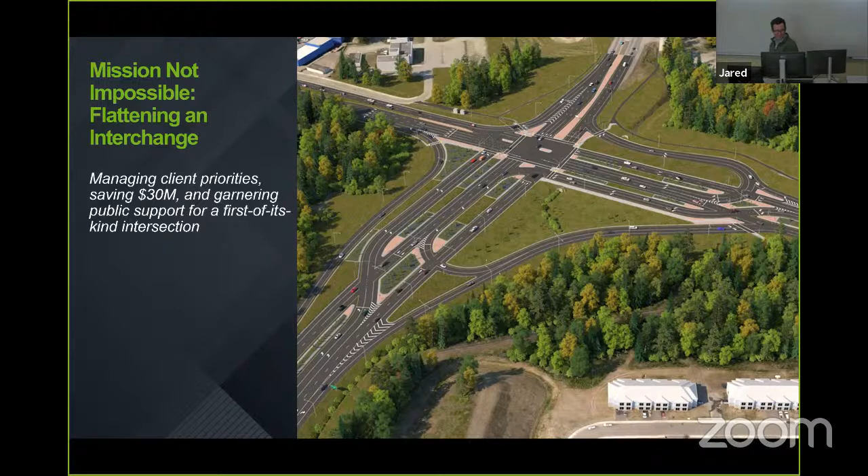If I want to refer to my notes and such, should I situate myself right here? Yep, and we should be going live now. Okay. Oh, you don't need to. Okay, you got the lights on you.

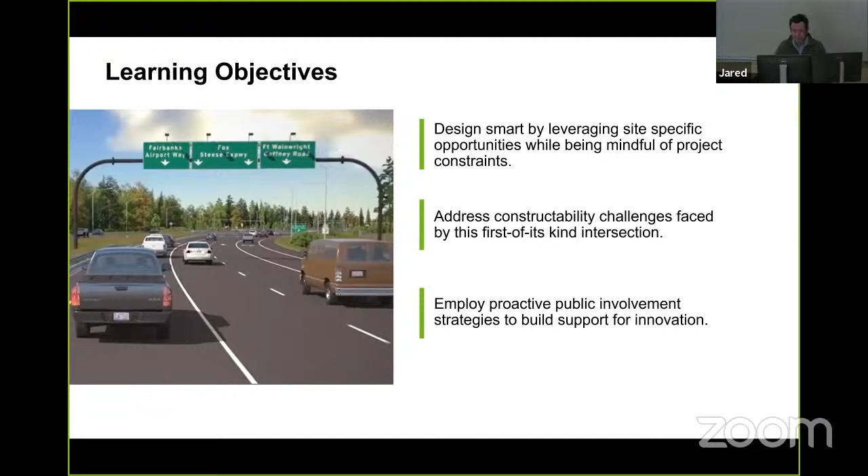The mission. Chapter 1. So here's the intersection of our focus today. This is in Fairbanks, Alaska. This is the nexus of Airport Way, Gaffney Road, Richardson Highway, and Steese Expressway. Some of you may be familiar with this intersection. But there's a lot going on at this intersection. It's a priority 1 intersection. That's engineering and transport lingo for it's really important and heavily used.

We have the Richardson Highway progressing from the south. Boy, I'm not sure why it slips backwards. Oh, this is you, Will. Here I am touching buttons and I should be cueing you. Next slide.

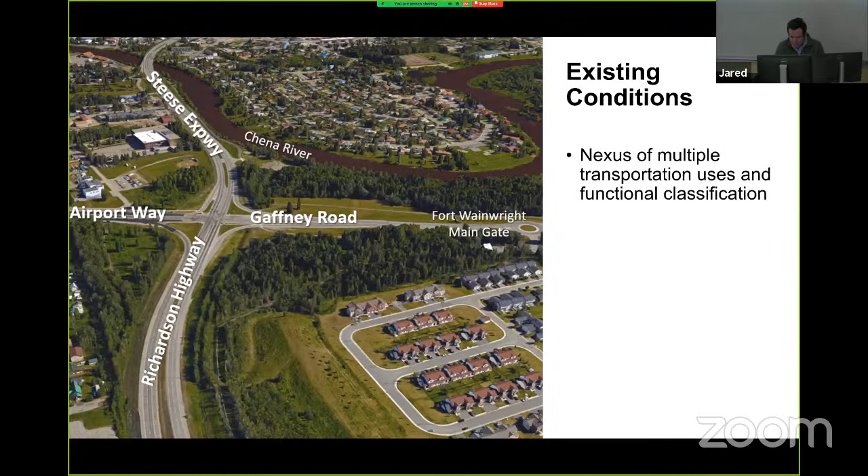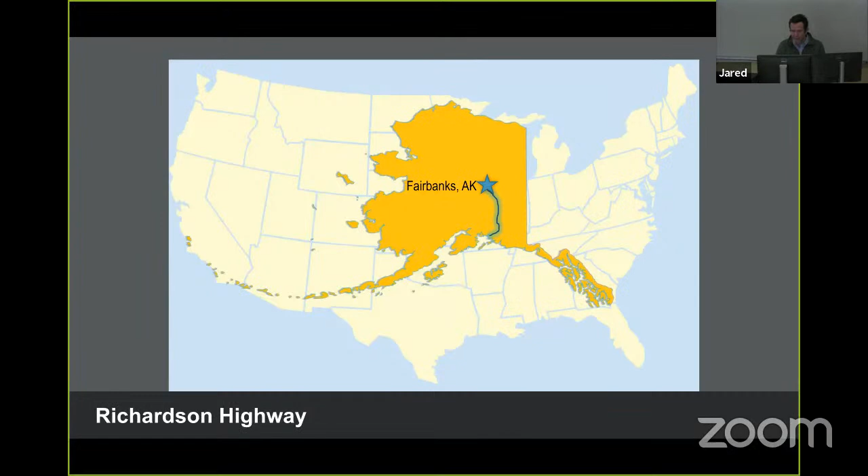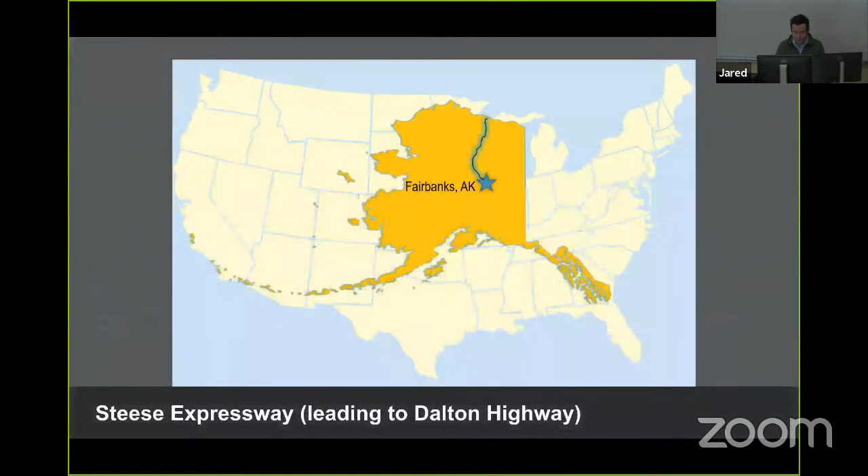Unfortunately, I can't see my notes, but we've got some 500 miles of Richardson Highway coming up from the south, and another 400 on the next slide. You'll see the Dalton Highway, which extends to the north. What does that mean for this project? It means a couple of different things. It sees a lot of traffic and it sees a lot of very, very heavy vehicles. This is something you need to consider in your engineering plan. The roadway structure needs to support not only a lot, but some very significant vehicles and their turning radiuses. Next slide, please.

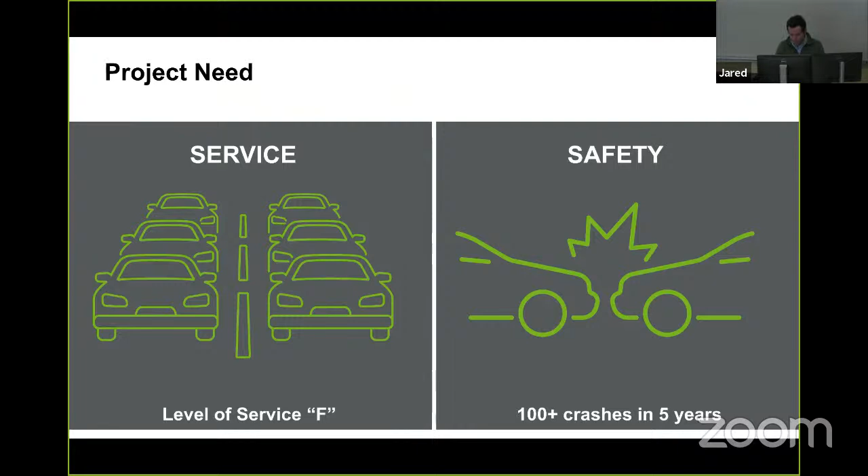Level of service, this is again some engineering and transport lingo for how well is this intersection performing today. Some of you may be more familiar with what an F means than others, but it's not good. It's also a very dangerous intersection, and this project is funded by HSIP funding. That means it's paid for by government dollars. Their focus is on safety of the community. So safety, as always, but particularly with an HSIP funded project, is of the utmost priority. Next slide, please.

So HDR was handed a preferred interchange concept. The way a project works is a lot of months and years go into a design before you really start getting down to the nitty gritty. It's kind of a conceptual feasibility phase of the project. And this is the design that was brought to our table. And it's not the design we ended up implementing. There are pros and cons to this diverging diamond design. You may have seen diverging diamonds in Anchorage. But there's pros and cons to this design.

The pros are typical to DDIs. It could handle the capacity, that's how much traffic we can move through the intersection. It can handle some of the heavy vehicle traffic, not only for vehicles heading north to the North Slope, but also from Fort Wainwright to the east of the intersection, and it handled capacity.

But it did close 10th Avenue north of this image. 10th Avenue is a left turn northbound, which handles an awful lot of traffic. And the reason it closed is because those ramps in the northeast and northwest quadrants extend quite a bit north. So that was a bummer that we weren't ready to palate.

And then it also involved right-of-way acquisition. In general, or always, that's something we try to avoid in construction and transportation projects. You don't want to take people's private property. Next slide, please.

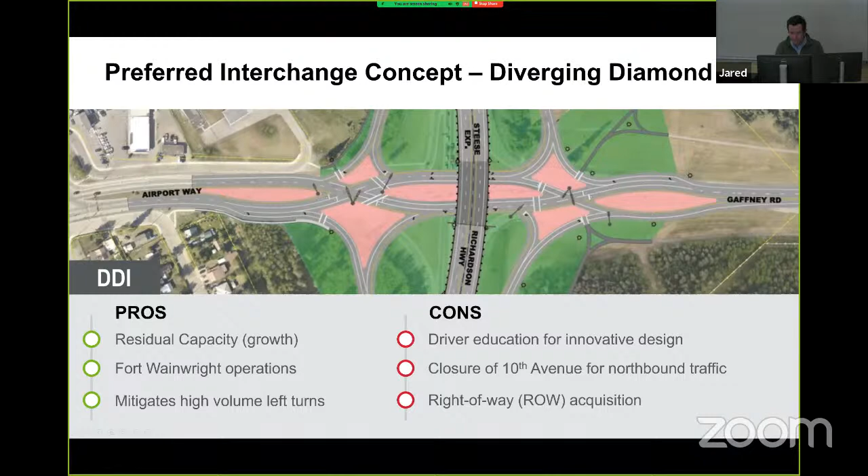So the question arises, is this mission impossible? And what tools do we have in our toolbox that we could implement to solve some of these issues? I'll hand it over to Will.

So at the moment, the current plan was to build a grade separation, full interchange at Gaffney, a DDI that's going to improve safety by removing conflicts and improve congestion by adding capacity via the free flow movements and the grade separation. However, once we started designing that, we got to an engineer's estimate that was close to $47 million.

The client, the DOT, Department of Transportation, said, hold on, are we sure this is the right solution for this intersection? And essentially what was a catalyst for us to take a step back and reevaluate the entire solution was the fact that Jared mentioned HSIP funding. That is a program for the state of Alaska where they have $50 million annually to spend towards transportation improvements that are going to have a significant reduction in crashes.

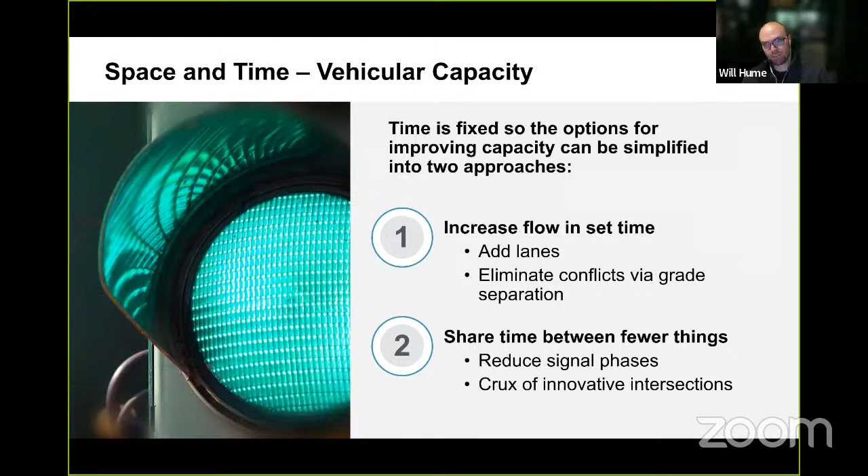But it's not just about capacity when you think about innovative intersections. It's also a way to improve safety for the vulnerable users, like pedestrians or those on bicycles, as well as improving safety for vehicles by removing conflicts within the intersection itself.

Ways that innovative intersections at times improve the intersection for pedestrians is they typically have shorter crossings, or they're crossing multiple road beds individually, and it reduces the number of conflict points, potential directions that can be involved in a crash. Other ways is it simplifies pedestrian decision making, and other treatments.

Since we have more green time available for the larger movements, we can do some other treatments with our signals that are proven to benefit pedestrian safety. One is where you give them a green light and let them start crossing the intersection before you release the vehicles from their stop bar, essentially protecting them, making them more visible within the roadway, and reducing the potential for turning vehicles to strike a pedestrian.

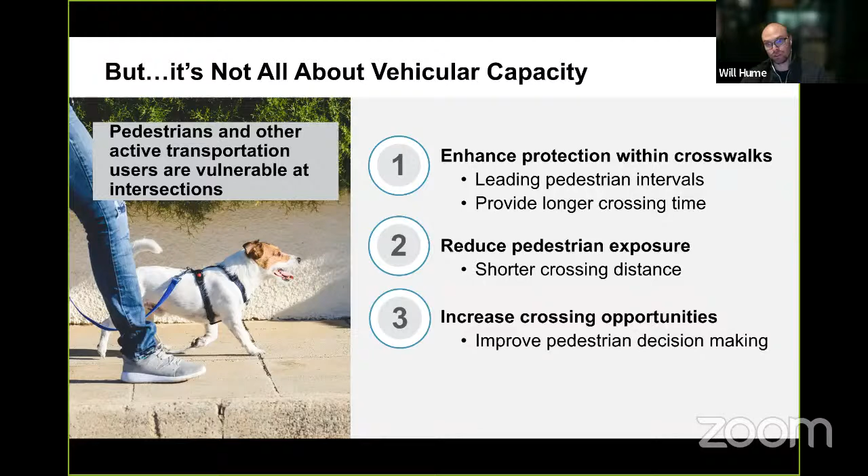So I'm going to talk a little bit about what an innovative intersection is. Really, the basic building block of an innovative intersection is a hyper focus on the left turns. And it's not left turns at the intersection, it's how can we remove the left turns and give them back to the traveling public in a different manner. And so these left turn treatments that we look at are displacement, diversion, or removal of the left turn altogether. And I'll walk through what each one of those are.

For displacement, the different types of intersection treatments that fall under the displacement category: one is your continuous flow intersection, or CFI. The other is for an interchange. A diverging diamond interchange is a form of a displacement. The second version or category for left turns is diversion. This would include your median U-turns and your restricted crossing U-turn type intersections.

And then the third option is you remove it altogether. You can prohibit left turns and throw up a sign and say left turns go somewhere else. You can utilize jug handles, or you can utilize quadrant roads. And I'll walk through each one of these, so you're aware of what each one of these look like and how they function. So I'll start with a CFI, or a continuous flow intersection.

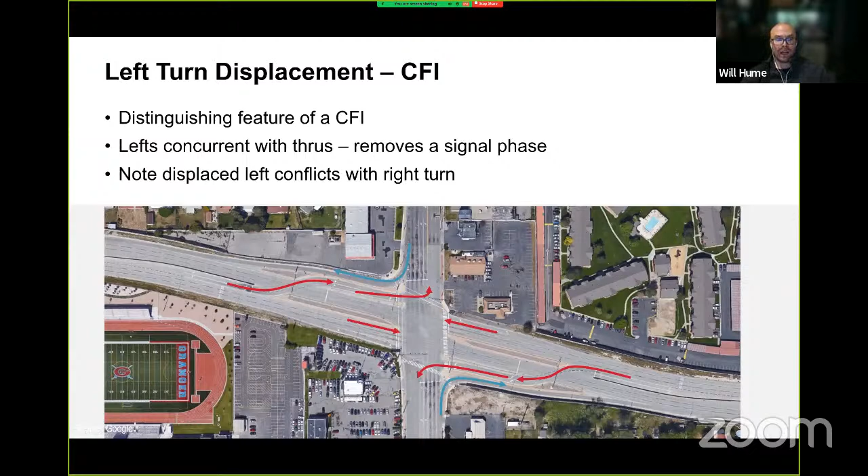The type of diversion type intersections, I mentioned a restricted crossing U-turn or an R-cut. And I also mentioned a median U-turn. These are also referred to as Michigan lefts, as there's quite a few of them in the ground in Michigan itself. And the whole purpose of these is to essentially send the left turns through the intersection and have them U-turn downstream at adjacent intersection.

A restricted crossing U-turn, however, doesn't just handle the left turns by diverting the left turns. It actually diverts all of the minor approach movement and forces them to turn right. Once those movements turn right, what would have been the through movement and the left turn movement, they are then U-turned at a signalized intersection downstream of the main intersection, at which point they travel back through the intersection and complete the intended movement.

The difference between an R-cut and a median U-turn is that the median U-turn still allows the minor approach through movement to occur at the main intersection, and it is only diverting left turns. And for this instance, the left turns would then, similar to the R-cut, turn right, they would then U-turn downstream at a signalized intersection, and then head through to complete their intended movement.

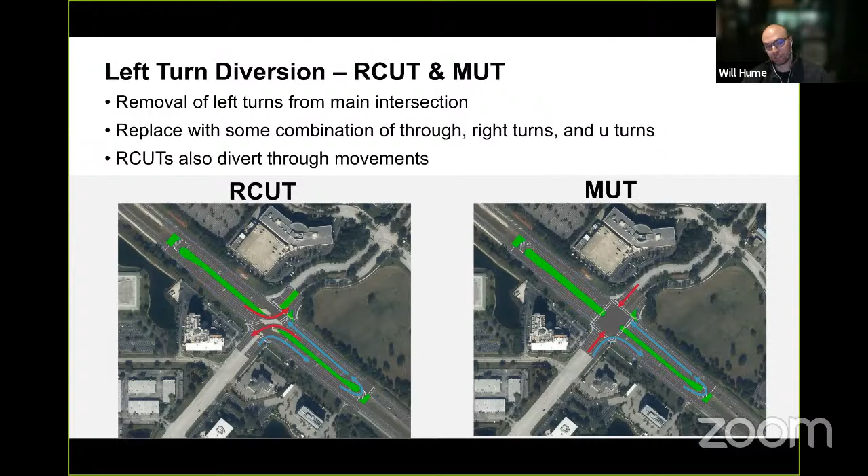The other type of innovative intersection is the quadrant road, and essentially that takes all the left turns out of the main intersection and looks to provide them utilizing one or more of the quadrants around the main intersection. And so for this particular example, all the left turns would utilize this quadrant road. It would add a signal adjacent to the main intersection to handle that increased movement through there.

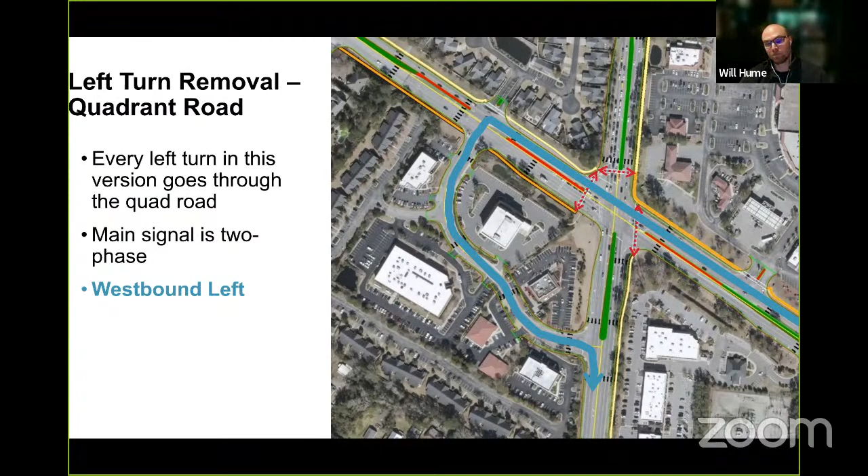And this allows for increased capacity as well as longer green times for the main through movements at the main intersection. And those are where your pedestrians are running with the through traffic. And so at times in areas where you implement a quadrant road, you end up providing more walk time for pedestrians, calming their walk across the intersection and improving for that.

So we took those tools and said, all right, everything is in play for our improvement at GARS. What can we do at grade to significantly reduce the cost and improve capacity? And so we applied some symmetrical treatments, meaning if we did one thing on one leg of the intersection, the mirrored opposite leg, we were going to do the same thing.

So the CFI, we did recognize some of the detriments. It only was diverting two of the left turns out of the main intersection, and so it wasn't addressing all left turns. There were still right-of-way impacts for the southbound bypass right turn and the displaced eastbound left turn. And the location of this eastbound left turn, you can notice this Noble Street here. This is also a signalized intersection, and so it was very, very confined between two signals.

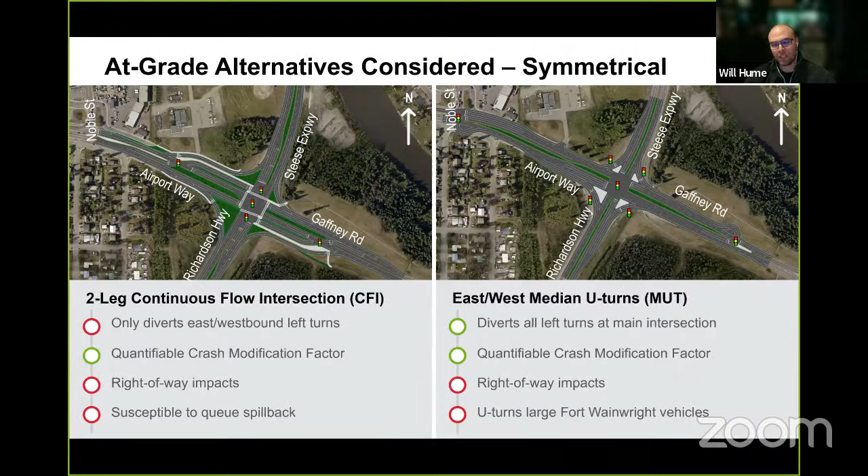When we developed the microsimulation model of this, it worked extremely well. It worked at the same level that a full-blown interchange or the DDI was functioning at. And so we thought we had a winner with this one. Although the footprint is quite large, it stayed within all existing DOT right-of-way, and it wasn't going to require any right-of-way.

Some of the reasons why this wasn't determined to be the preferred alternative was the fact that we are combining these elements in a way that we didn't feel we would actually be able to quantify a crash modification factor for it. And without that, we would potentially be losing our federal funding. Some of the other detriments, although we're utilizing DOT right-of-way, we're impacting a lot of the existing trees. Those trees don't just improve the aesthetics of the intersection, they also act as a buffer for sound to the adjacent homes. And so we did recognize that as an impact.

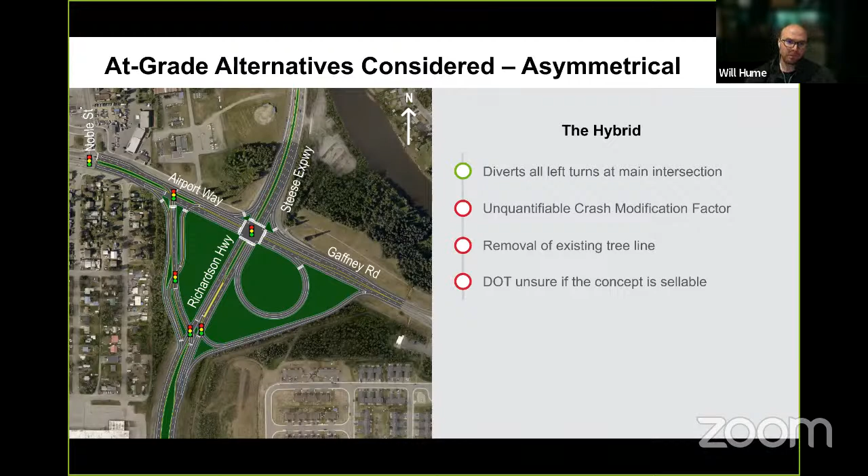Ultimately, the DOT said, I don't think we could take that to the public and sell it as the solution. And so they said, what else do you have? And we said, all right, give us one more chance, and I think we can come up with something. And that's where we developed the CFI MUT hybrid. This innovative intersection, although it looks like a bowl of spaghetti from a bird's eye view, essentially is a CFI MUT combined for two of the legs.

The eastbound left, as you see highlighted on my screen, would go through the main intersection downstream to a signalized dual left turn. This signal is highly coordinated, and so vehicles would not be stopping more than once. And they would complete that U-turn and then make a right turn back at Steese to complete their movement. That eastbound left is paired with a displaced westbound left or CFI treatment, at which point they would be located to the outside of the opposing through movement and running on the same phase as that through movement at the main intersection. Similarly, the northbound is a CFI treatment, displacing them to the outside of the southbound through movement, and that is also paired with an MUT movement for the southbound.

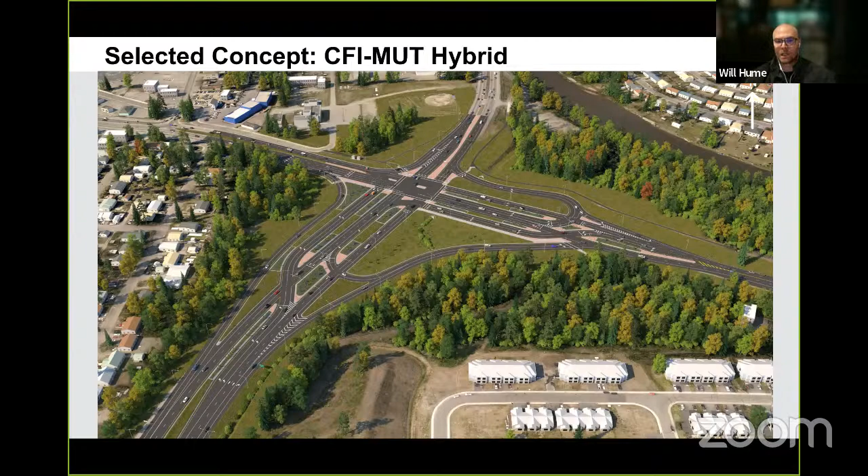Like I said, this from a bird's eye view does look quite complicated, and although we're taking one signal and breaking it into three, through really good signal coordination and spacing of the signals, we're able to provide some really good operations for this, as well as recognize the safety benefits of those CFI MUT treatments. And so this one really did check all the boxes. It diverts all the left turns out of the main intersection. We were able to develop a quantifiable crash modification factor, just normalizing the CFI and the MUT treatments. There's no right-of-way impacts, and Fort Wainwright was quite pleased to see that really their movement is prioritized and they're not increasing the vehicle miles traveled.

When it came to checking the client's goals of reducing the total cost of construction, the capital cost was estimated to reduce from $30 million. And so we were able to get it down between 15 and, when all said and done, around $17 million. Comparing annual maintenance costs, it was also less than if a full-blown interchange is going to be constructed, although the no build from a maintenance standpoint was going to pencil out the cheapest until it reaches a breaking point. And so overall, beneficial cost savings.

The question is, how happy do you think the general public was to see such a unique and innovative alternative concept for the GARS intersection? You can go to menti.com. I don't believe that link is live. But you can think about it.

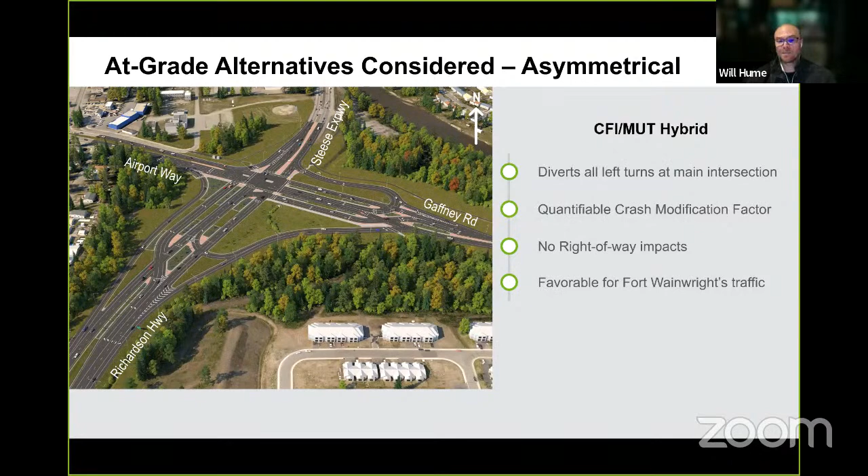You as a public, you're traveling through this intersection every single day, a typical T intersection, and one day DOT and some engineers say, hey, I got an idea. We're going to do this. And this is what we showed them. And ultimately, let's just say the answer is C. The public were not on board entirely from the get-go. They were angry. They let their opinion be heard.

And most of them wanted just to go ahead with the DDI, spend the money, even though that would essentially remove funding for hundreds of other safety projects across the state. And that's where the mission gets even more complicated. I'll turn it back over to Jared.

So we're getting into the part of the presentation where we just wanted to touch on some aspects of the profession of transportation engineering that's, I'm not going to say unique, but I'll say it's special to our discipline. Transportation engineering really touches on so many things. It very much touches on water resources and management of water. Where's the water going to go through our projects? It very much touches on geotechnical engineering and structures and transportation and civil and construction management.

Transportation as a profession, they touch on all these things, very multifaceted, and keeps your engineering gears ideally turning, certainly active throughout your career. Another aspect that I know I didn't touch on through my studies in engineering is the public engagement, the public outreach. These are civil projects. They take place within our communities, and they're funded by taxpayer dollars. So we need to get approval and buy-in from stakeholders. Who are our stakeholders? There are many, but most importantly, arguably, it's the public. Are they going to be okay with this project when we put it in the ground?

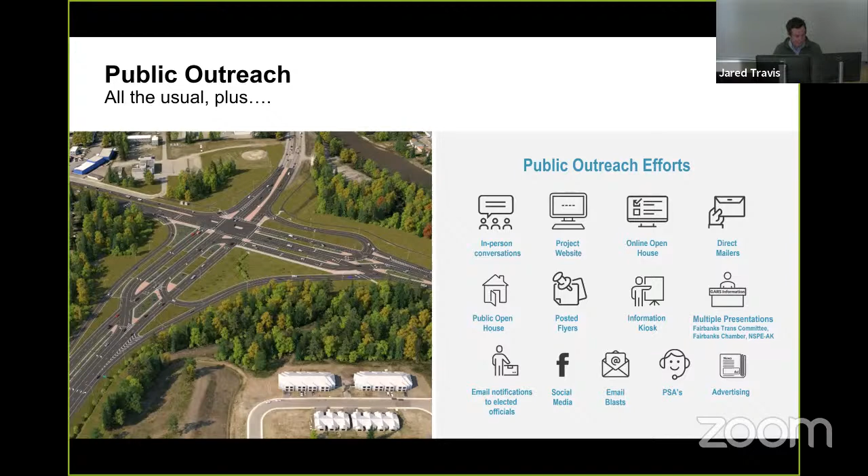We have public open houses. Here's a little pencil sketch video. Go ahead and click the link. It might take a moment to load. That we put together, and that was posted on DOT sites and available to the public through Facebook, etc.

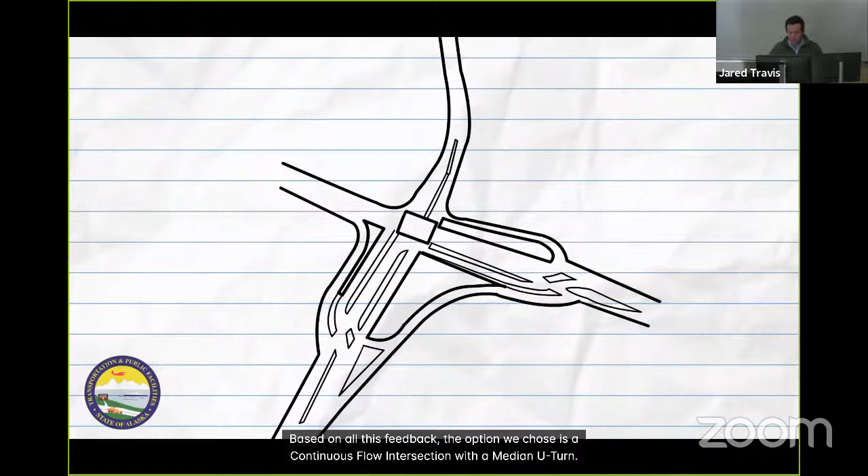Here in Fairbanks, we've always been problem solvers. So when faced with the challenge of delays, congestion, and crashes at the intersection of Gaffney Road, Airport Way, Richardson Highway, and the Steese Expressway, we went to work on a solution. We originally thought an interchange would be the best option, but that would be too expensive and unlikely to be built in the next few years. So we asked traffic engineers, local experts, and you, Fairbanks, what we should do. Based on all this feedback, the option we chose is a continuous flow intersection with a median U-turn. It may look complicated from above, but it will make sense to drivers on the ground. Detailed videos on the intersection are coming soon. Stay tuned for a safer, more efficient, and affordable intersection in 2022. Thanks to you, the people of Fairbanks.

That website's still live, by the way, if you want to explore the project more. You know, I watched that video and I can't help but think that maybe Will and I could have saved you all about 30 minutes of your lives. We should have just played the video. That sums it up pretty nice. It's simple, it communicates to the public, I think, the important matters. Now what is that touching on in the professional realm? I mean, it's communication, it's graphic design, psychology, it gets pretty complex. So we have a really diverse team sitting in our meetings and it's a lot of fun.

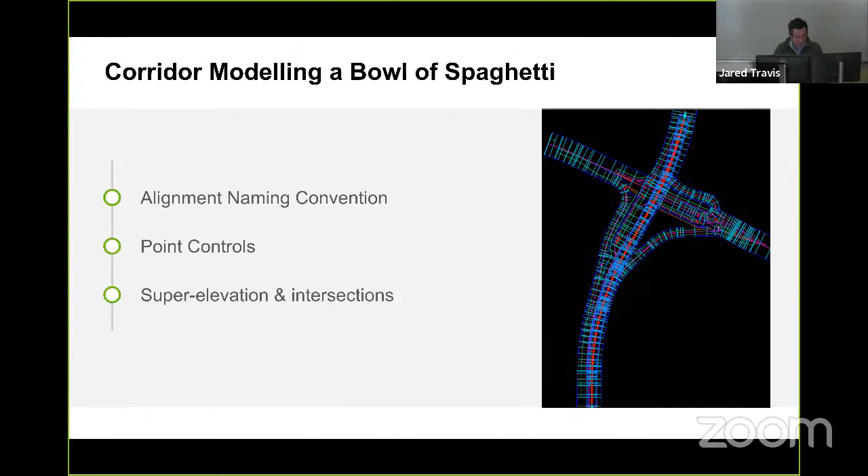That's more or less what the public will drive through the intersection, but it's also the foot by foot definition, how we define the project, whether it's where the curves are going to sit, where the radiuses of those curves initiate, where the cross slopes and the asphalt goes. That all hinges on these spines, which are called alignments. Complicated project like this, I'm sure it was 40 various alignments. Some of them are center lines, offsets, curves. It gets pretty complicated pretty quick. Go ahead on to the next slide.

So this project was really complicated. One thing that we did that's different than many projects is we really sat on all these XYZ points, and the contractor and the survey team were able to go out there and stake out the whole project. Lots of review from lots of parties across the country. HDR is a large company, but we had input from all quadrants of the nation, all various gurus, and the best of our best were able to chime in on this project to make it the most that it can be.

Move on to the next, please.

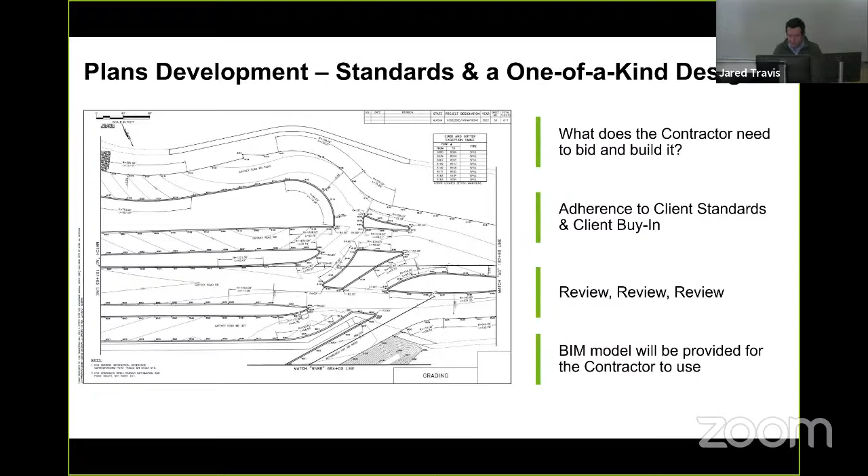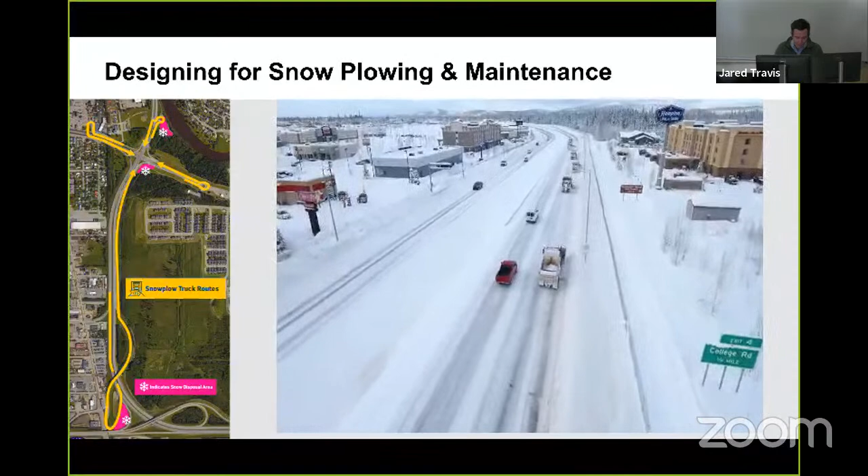So there's all this phasing: what are the most important traffic movements that we need to maintain? How can we build around those movements? And how can we close it down for the winter when construction stops, in the very best manner for usage through the winter season?

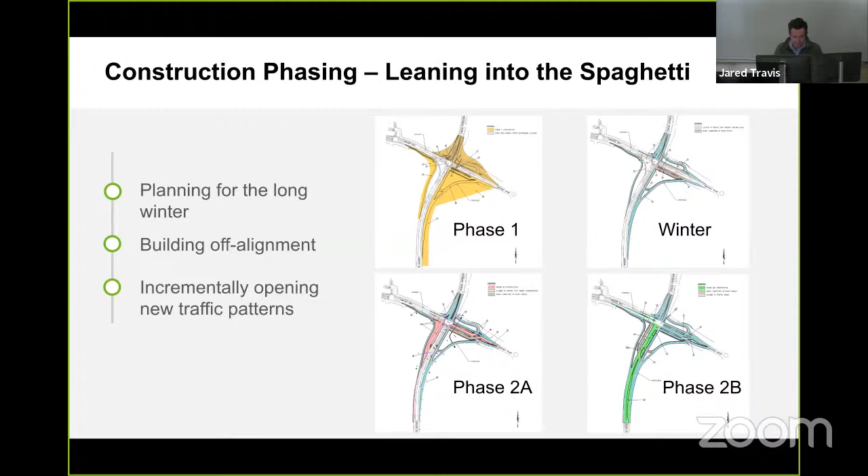With that, we'll call this a mission accomplished. I hope you're able to take away some of the key takeaways we touched on initially, but mostly I just want to emphasize that transportation engineering is a great profession. It touches all the bases, and it keeps you active and engaged up here.

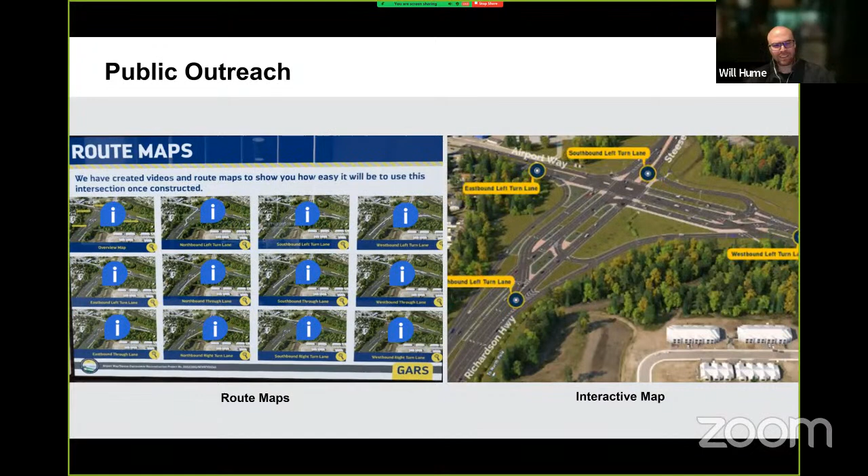Oh, look, you really have more. Yeah, I don't know what happened. These next 2 slides were somehow skipped.

I wanted to touch on that public outreach component. And so not only was it, hey, we need a message to the public, this is the solution that's going to be the most cost effective, it's going to reduce the crashes, it's going to improve your travel time for your commute.

This type of intersection, because it looks so intimidating from a bird's eye view, what we ended up doing was developing this interactive virtual map that allowed them to go to the website, click on, well, I always make my eastbound left turn. What does that look like for me now? And we developed these animations that actually show you what it would be like for you to drive this once it's constructed. And this was to help gain more of that public opinion and acceptance of this solution to improve.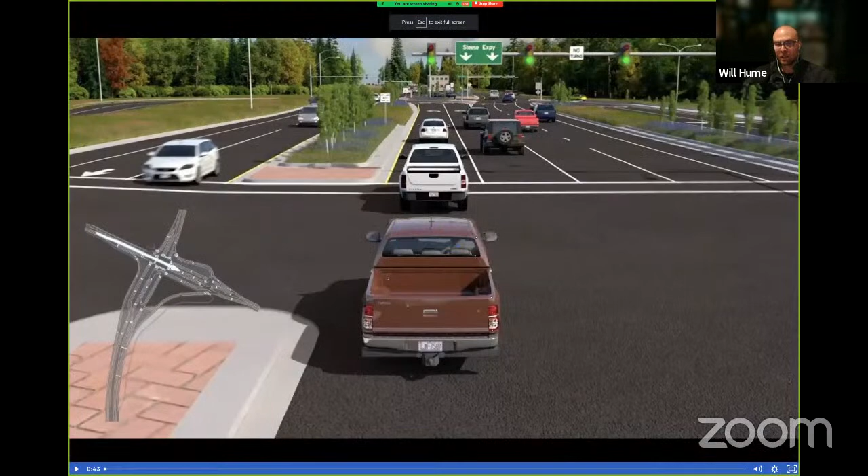And so this is, you're driving eastbound on Airport Way. You now have gotten to the main intersection, the GARS intersection, where you are at a red light. You're released for your green light. You travel through the main intersection, and you're approaching that downstream signalized intersection, which you will be arriving essentially on a green. You travel through the intersection, complete your U-turn, where you also are still arriving on green for that right turn.

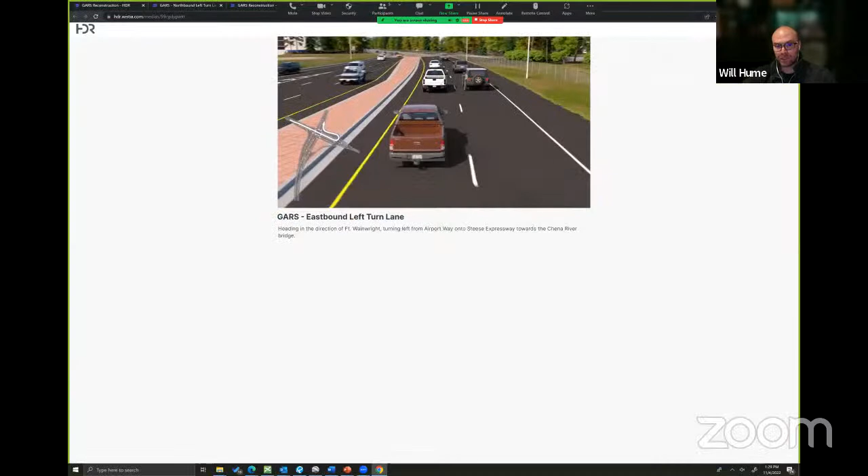The coordination of this was quite complex. Typically, when we look at corridors, we're progressing eastbound and westbound simultaneously. This was a lot heavier on a stage-based or movement-by-movement type treatment, but I'll walk through the northbound left turn, which is the CFI treatment. And so you're traveling northbound on the Richardson Highway, at which point you get in your dedicated left turn lanes. You arrive there at a red light and you wait. You are then released for a green light. You travel through the crossover intersection to the outside, at which point you typically are arriving on green as well.

And so from a level of service standpoint, although vehicles are having to travel through multiple signalized intersections, the signal timing of it has been coordinated in a way that it really reduces the potential of a vehicle having to stop more than once at a signal.

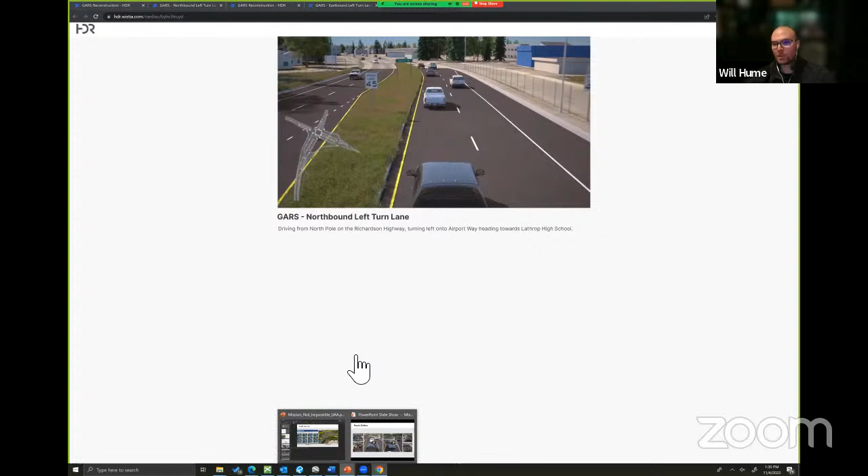And these were quite helpful to calm the public down, looking from a bird's eye saying, I don't know how I'm supposed to drive through that, showing them these renderings and these driver view animations. It showed them that, I'm still making my left turn from the left side of the road. I'm still making my right turns from the right side of the road. It's not as complicated as it looks once you're actually in your vehicle and you're driving through it.

The other thing this did was allow us to really see the overhead signing that we were providing to show the drivers that they'll have clear guidance well in advance of the displaced movements to ensure that there's no abrupt movements or undesirable driver behaviors that are going to be created based on this innovative design.

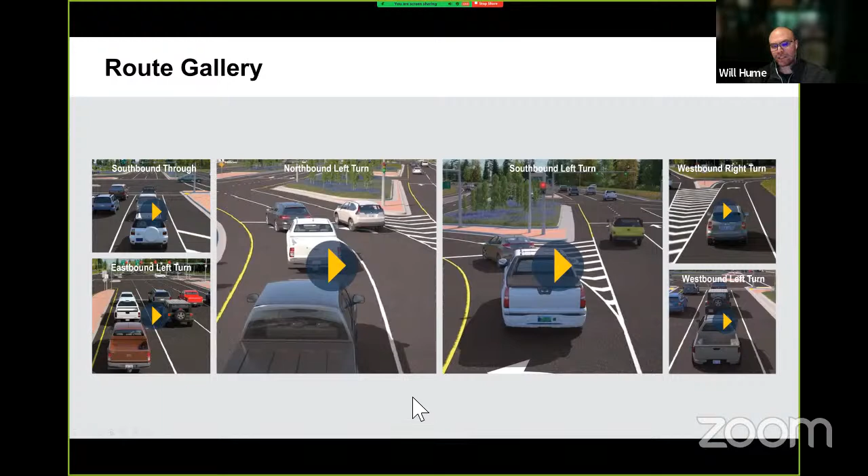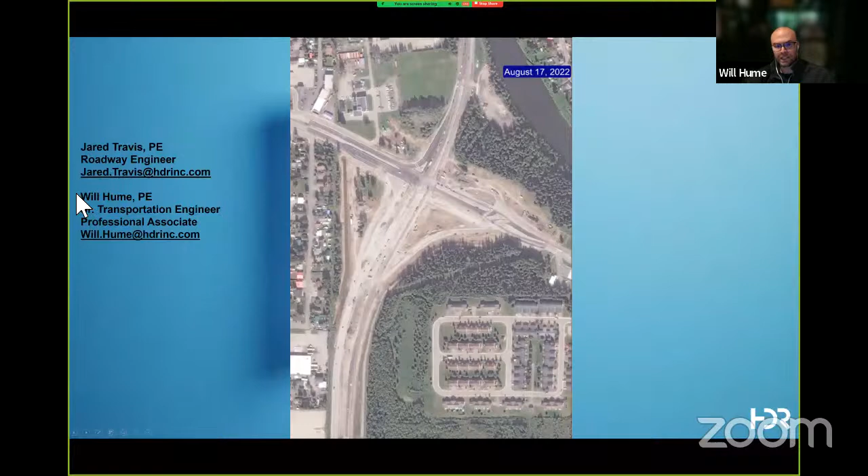I'll get back to our contacts. I do have a micro simulation model of this. It's posted to my LinkedIn page. So if you want, you could find me on LinkedIn and you'll see a post from me that shows the 2045 AM and PM peak periods of how this will be operating.

And then what you see on the screen is the actual intersection under construction. You can see how it really does look like that pretty rendering picture that we developed based on our alignments.